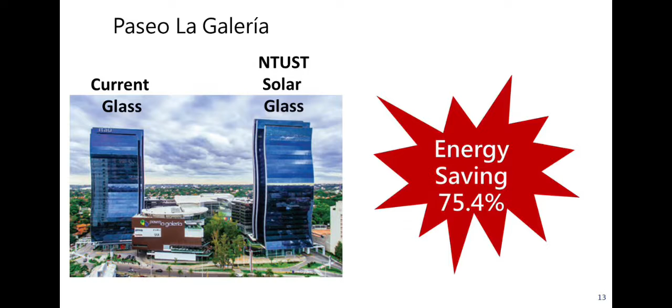Why can the glass generate a lot of solar power? Because we set up a semiconductor inside the glass, and we also set up a very good insulation function inside the glass. For example, when we apply it on the gallery, compared with the current glass, it can save 75% electricity.

Good morning, everyone. Team 1 are students from UPTP. They will do the test of solar glass applied on skylight and the window in Paraguay.

Hello everyone and welcome to our forum. Today, my classmates and I will discuss our research on the topic of renewable energy in Paraguay, and more precisely, on the introduction to our country of NTUST heat insulation solar glass. Professor Xin Huaiyong is our research advisor, and Janina Monjes and I, Eric Striving, will discuss the results of our learning and testing throughout this semester.

On behalf of all students of the UPTP that worked on this project, I would like to briefly outline our aspirations. First of all, to learn about renewable energy through experimentation. Then, to expose Paraguay's potential for a more widespread adoption of solar power generation techniques. And finally, to hopefully inspire change in our country by ourselves someday.

The application of photovoltaic modules on buildings. What makes heat insulation solar glass different? There is one key difference between traditional crystalline solar panels and solar glass, and that is transparency. Heat insulation solar glass is produced by applying a coating layer of semiconductor to the base glass instead of cutting solid silicon ingots. This allows for various degrees of transparency the more silicon is cut, and gives solar glass the ability to serve different purposes, to be applied on buildings, in skylights or windows, rather than just on roofs, as traditional crystalline solar panels would be.

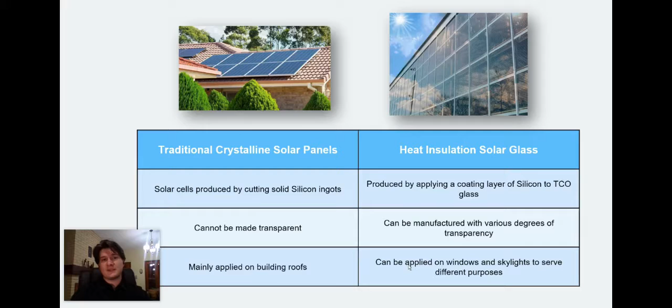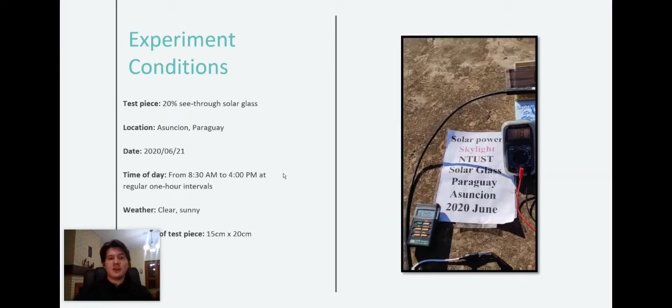So now I will walk you through the first of two tests my research team and I conducted, this one being focused on the application on skylights of 20% transparency heat insulation solar glass. The experiment consisted of, on a sunny day, measuring sun intensity and the corresponding current and voltage output of a 20% see-through test piece at regular 1-hour intervals. We tested from 8:30 a.m. to 4 p.m., covering the hours of effective sunlight to get an idea of how solar power generation changes throughout the day and in which direction solar panels should be aimed in our country.

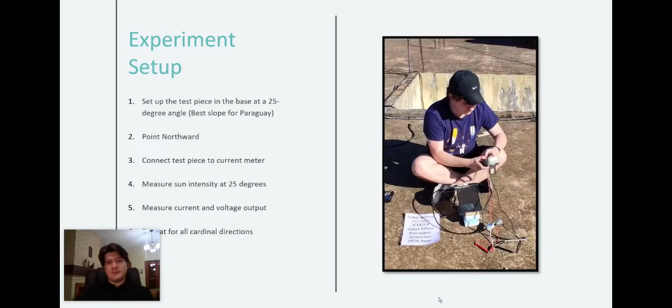The experiment was set up as follows: setting the test piece at a 25-degree angle, which is the best slope for solar power generation in Paraguay, pointing northward and measuring current and voltage. This process was repeated for all 4 cardinal directions every hour. Here we have the highest measurements we obtained, which unsurprisingly came at 12 p.m. while pointing northward, when the sun is highest in the sky. We have here some examples of the experiment setup and the measurements we took.

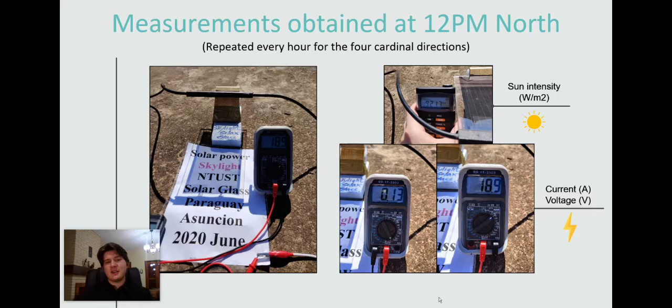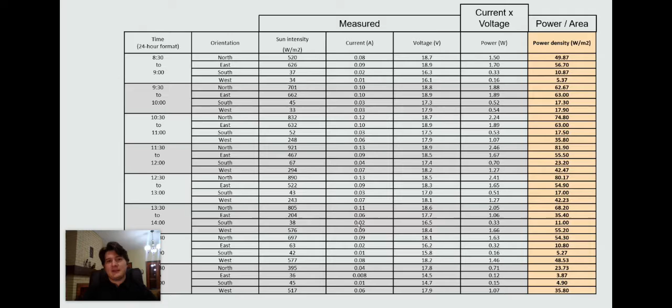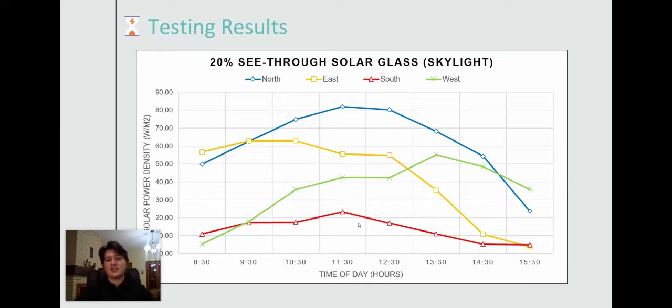This table contains the data gathered throughout the day. The key takeaway here are the values of power output density, obtained by dividing power, which is current times voltage, by the area of the test piece. Plotting time of day and power output density gives the following graph, in which we can see that pointing north provides the highest power output for 20% transparency solar glass applied on skylights in Paraguay.

Analyzing the results obtained from this test leads to the following conclusion. When installing photovoltaic modules in Paraguay, the best direction to point them in is north because they produce the highest average power output there. Now, as a personal conclusion to my learning of this subject, I will add that solar power calculation is easily done through specialized software that helps one pick the right parameters for installation. This can really be done by anyone, and I say it so as to encourage the adoption of renewable energy sources in our country.

And finally, to leave you with the core message of this presentation, power generation, when done with the environment in mind, will put us on the right path to change our current climate situation. So I hope this proves to be a new option for Paraguayans to adopt.

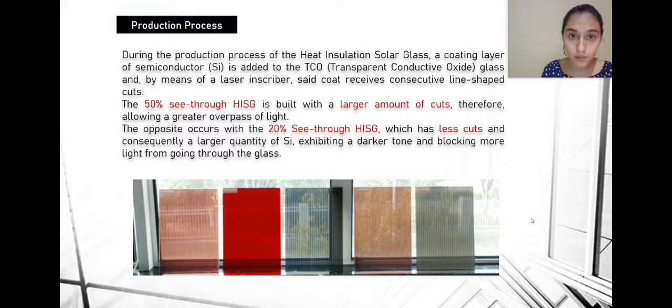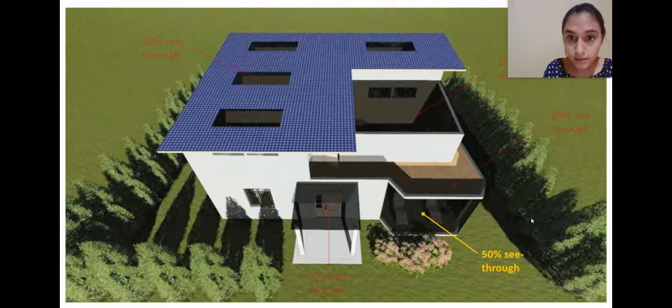With respect to the application, the 50% see-through is mainly applied on windows because of its transparency levels, and the 20% see-through solar glass is mostly applied on skylights because it allows a minimum amount of light to pass through the glass and also helps to save resources that otherwise, with a normal roof, would have been invested in lighting systems. Here we can see the 50% see-through on windows and 20% see-through solar glass on skylights, as I mentioned before.

And with respect to the testing process, I highlighted some points about the procedure. The first one is to set the solar glass at a proper slope. Because we are imitating the position of a window, we set it at 90 degrees from the horizontal, then we configure the multimeter to measure the current and the voltage. We also use a solar intensity meter to record the sun intensity of that day. We measure the current, voltage, and sun intensity at each cardinal direction and repeat the whole procedure every 1 hour.

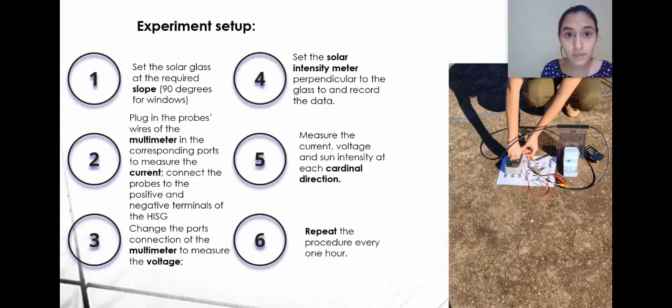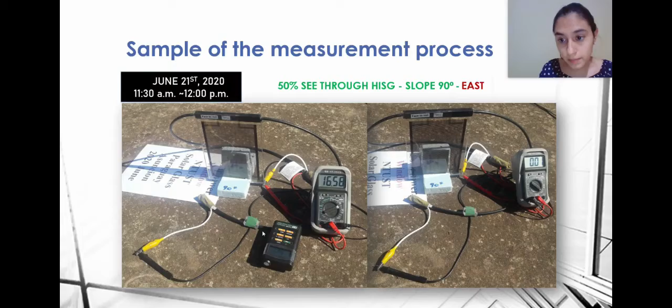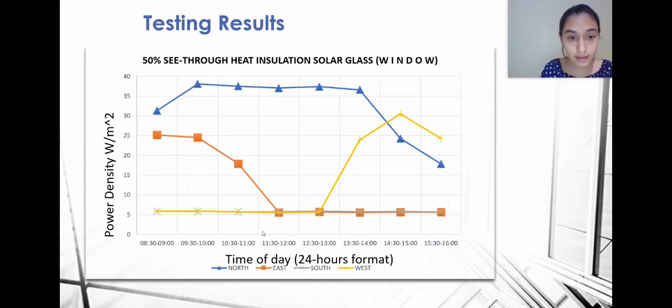Here are some pictures of the procedure. At the left-hand side, we can see the multimeter measuring the voltage and also the sun intensity meter right here. And at the right-hand side, the multimeter measuring the current. We ended up with this graph, which shows where the higher amount of power density was generated.

Team 2 are students who did the solar power efficiency test, and they will do the analysis of two kinds of glass. Hello everyone, we are Team 2 and we are going to talk about the solar power efficiency of NTUST solar glass in Paraguay. I'm Daniela Bogarin and my classmate Camila. We are both students of civil engineering at the UPTP.

So, the test was performed in Asunción, Paraguay on a sunny but cloudy day, in the morning around 10:30 a.m. We tested the 50% and the 20% see-through solar glass. We used a solar power meter to measure the sun intensity and a multimeter to measure voltage and current. The solar glass has a transparency percentage, and in order to understand what makes them different from each other, we need to explain the making process.

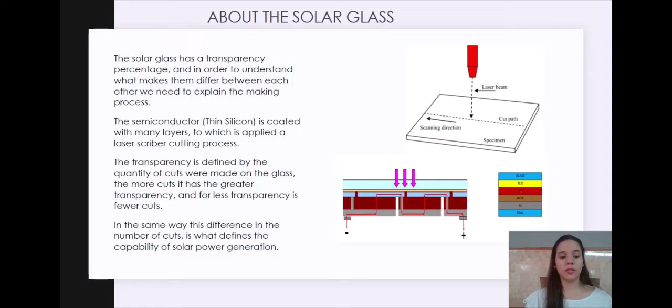The semiconductor, thin silicon, is coated with many layers, to which a laser cutting process is applied. The transparency is defined by the quantity of cuts made on the glass. The more cuts it has, the greater the transparency, and less transparency means fewer cuts. In the same way, this difference in the number of cuts is what defines the capability of solar power generation.

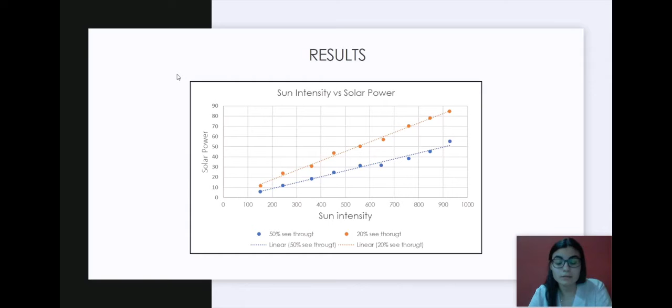So to express the results, we display the gathered data in a graph of sun intensity versus solar power, and it's clear that the 20% see-through solar glass has higher solar power generation than the 50% see-through solar glass. The 50% see-through solar glass is in blue and the 20% see-through solar glass is in orange. So that's all, and thank you very much for your attention.

Team 3 will do the heat insulation test for you, and they will tell you about the insulation efficiency of the solar glass.

Heat insulation efficiency of NTUST solar glass in Paraguay, by Manuel Pasmore and Joaquin Maldonado, Team 3. The NTUST solar glass you have seen before has the property of being a high power generator and also a good heat insulator. But first, how exactly does solar heat work?

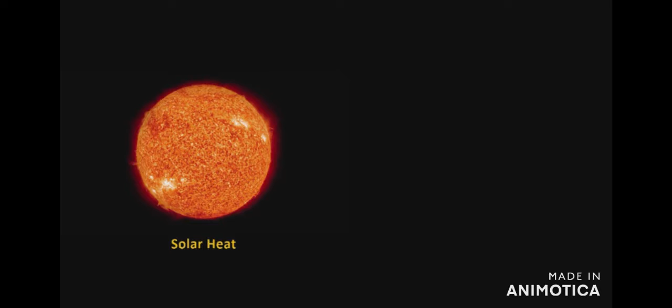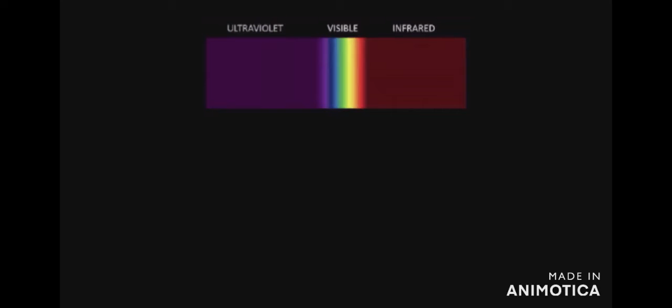The solar heat we all know is derived from solar energy. This energy travels from the sun as light particles called photons. These particles have different levels of energy and different wavelengths. However, all photons, especially low-energy infrared photons, can cause objects to heat up due to an increase in the kinetic energy of the molecules.

But how can the glass use solar energy to produce solar power? Let's look at the heat insulation solar glass closer. This solar glass, first developed in 2009, was made out of a thin semiconductor film, covered by a double glass layer of 4 millimeters at each side. It produces around 80 watts per square meter.

By 2012, the second generation of the solar glass was developed, but this time it had 2 extra layers. It has an infrared reflection film with a gap of 6 millimeters at each side, and at the back another layer of glass of 6 millimeters. This time it produces 102 watts per square meter.

The test that you will see here is the test that we performed with the help of Professor Young. We measured the sun intensity on the front of the glass and at the back of the glass. The results we got for the first and second generation were the following.

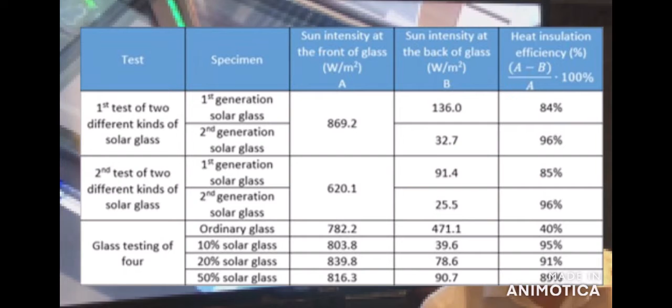For the first generation solar glass, on the first attempt we got 84% heat efficiency, while for the second generation on the first attempt it was 96%. For the second attempt, the first generation got 85%, while the second generation was 96%.

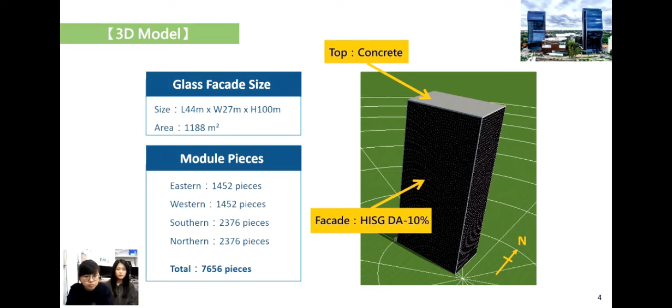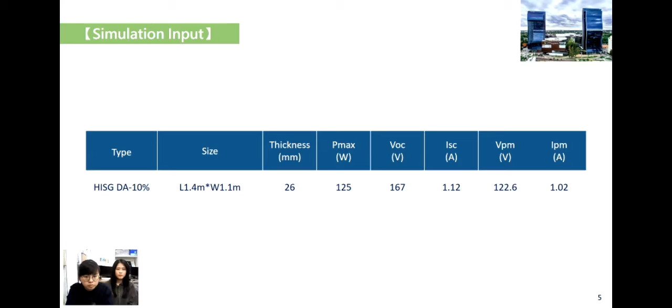First is solar power generation. This is our model. Glass facade size is 44 meters long, 27 meters wide, and 100 meters high. We use modules on 4 facades, a total of 7,656 pieces. On the top, we use concrete material. This is the electrical value we input. Per module size is 1.4 meters long and 1.1 meters wide. Maximum power is 125 watts.

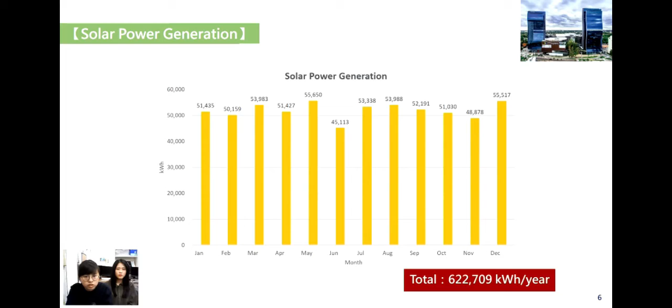We use PVsyst to simulate, and we found that the building using HISG-DA 10% can generate 620,000 kilowatt-hours per year of solar power.

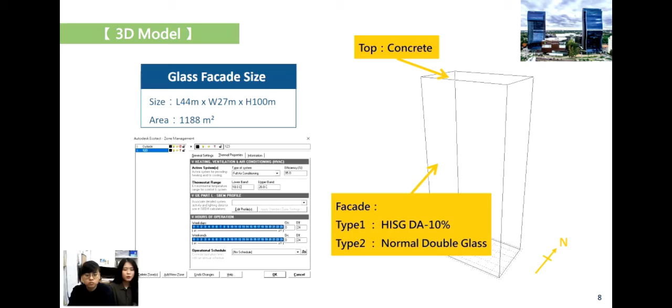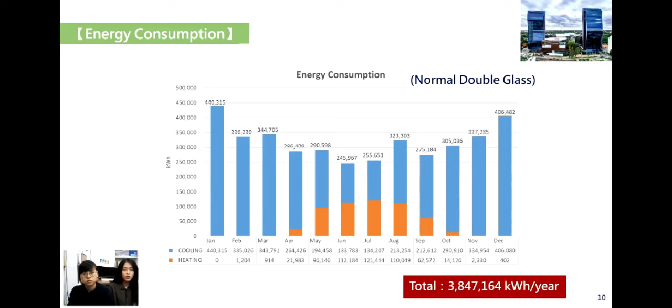We use Ecotect to simulate, and we found that the building using normal double glass needs 3.8 million kilowatt-hours per year for cooling and heating. The building using HISG only needs 1.5 million kilowatt-hours per year.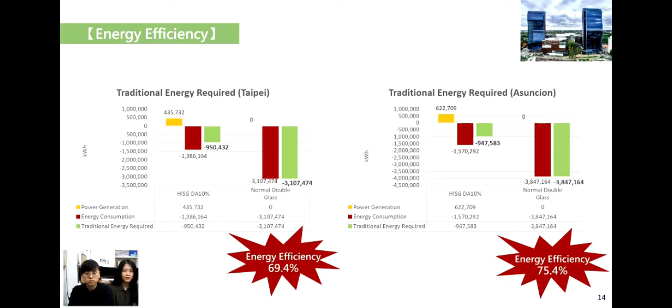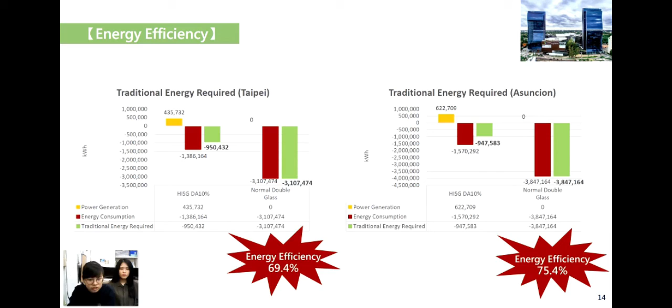This is the energy efficiency comparison. Left is Taipei; energy efficiency is 69%. Right is Asunción; energy efficiency is 75%. We can find that energy efficiency of Asunción is better than Taipei. One of the reasons is that Asunción receives more sunshine and generates more solar power.